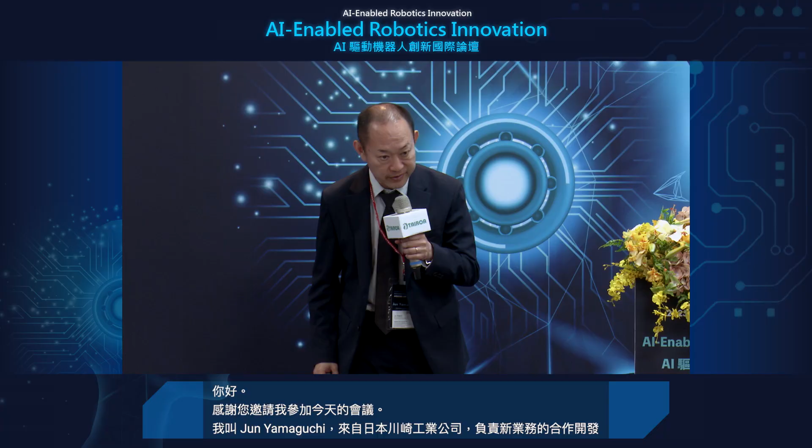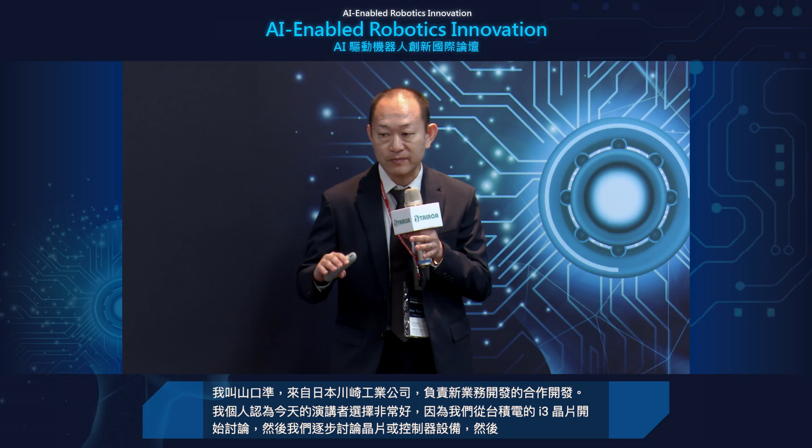new business development. Personally, I think today's selection of speakers is very good because we started a discussion from the silicon level, from TSMC, and after that we stepped up to the chips or controller devices, and after that to the environment for development.

For now, I'd like to share my information about the social implementation for robots. Before that, I'd like to introduce Kawasaki briefly, and after that introduce our initiatives for social robots. After that, this is a core part: the third point is robotics sophisticated by AI. And after that, we'd like to introduce some collaboration space in Japan, Kawaruba.

As you know, we at Kawasaki provide a wide variety of products for sea, land, or air. And I hope many people enjoy Kawasaki's motorcycles in your house, hopefully.

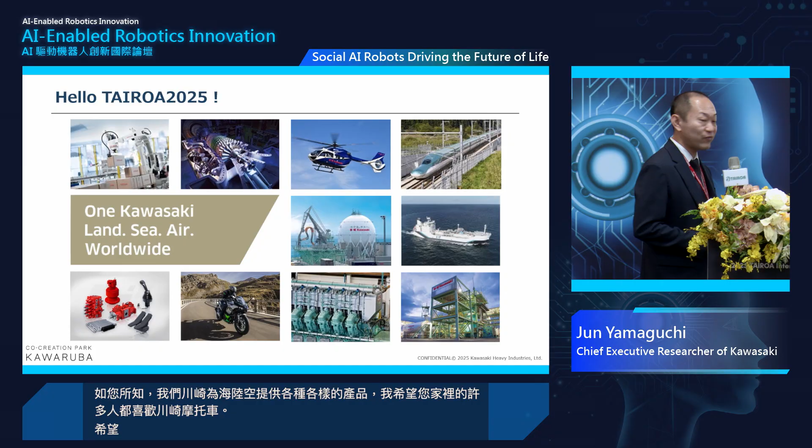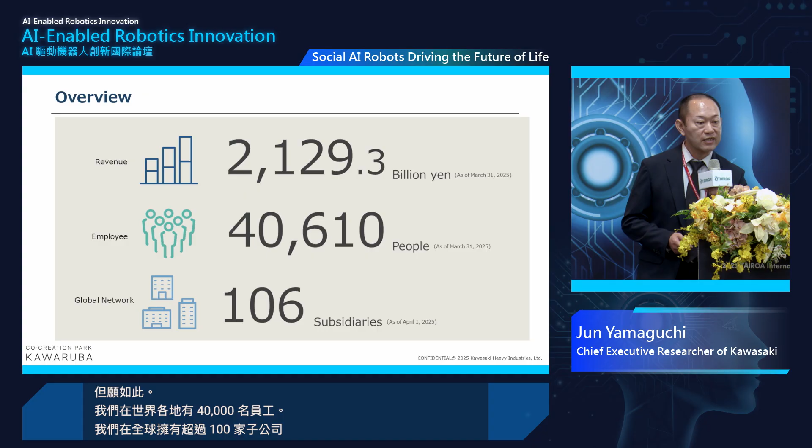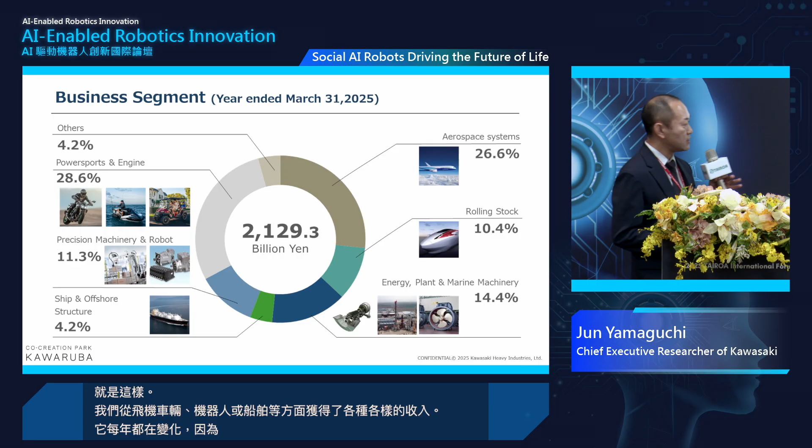In Kawasaki, we have 40,000 people working all over the world, and we have over 100 subsidiaries worldwide. We have a wide variety of income from airplanes, rolling stocks, robots, or ships. It changes year by year because world economics drastically changes.

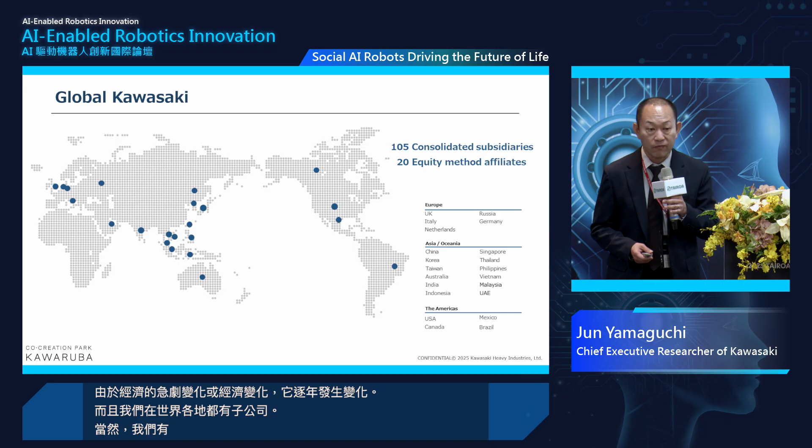We also have subsidiaries all over the world. Of course, we have subsidiaries in Taiwan mainly for robotics.

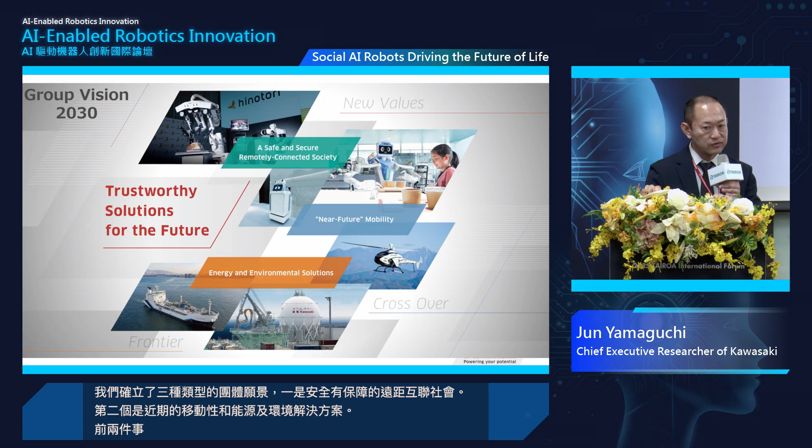We established three types of group vision. One is a safe and secure, remotely connected society. The second is near-future mobility, and energy and environmental solutions. The first two things have a very deep relationship with social robots, I think.

Okay, let's go on to the deep dive into the social robot initiatives. Let's track to our initiatives.

Maybe some people know Kawasaki started the industrial robot business over 50 years ago. After that, we promoted our robots into the automotive sector. After that, we enhanced our promotion to the semiconductor system. And recently, we step out from the factory for robots, mainly for telesurgery systems or humanoid robots.

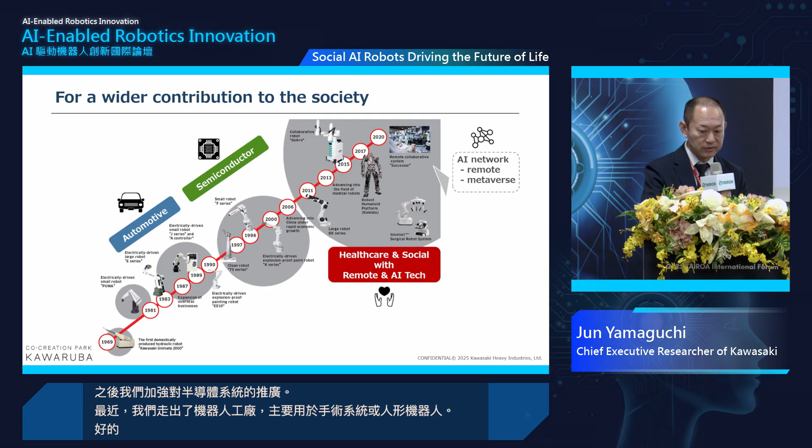Let's go on to our recent activities in these 15 years. Firstly, we started incorporating cutting-edge technologies into robotics. For example, the second era is robot plus network.

That means a robot can be operated remotely, so a robot is not a machine, it's a remote worker. The third era is robot plus network plus AI, as we discussed today, and that can determine the robotics itself and communicate with a human through the robot.

So we call that the robot can be an assistant, not a machine. The fourth era is robot plus network plus AI plus agent. They can decide their behavior by themselves, meaning the robot is a companion. In this later part, I will show you some small videos for each case.

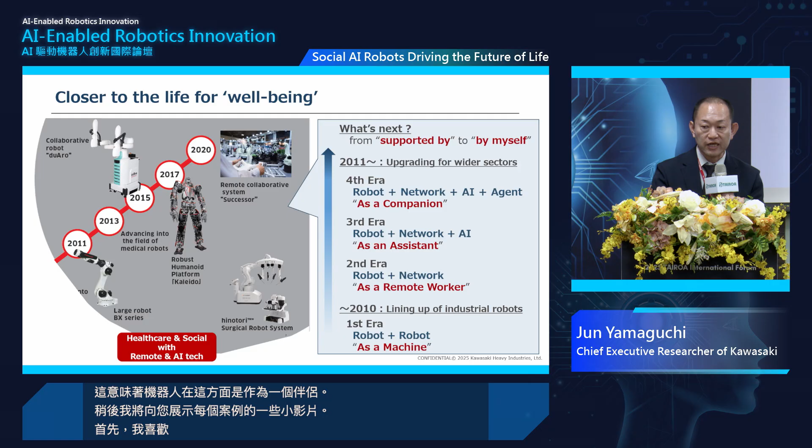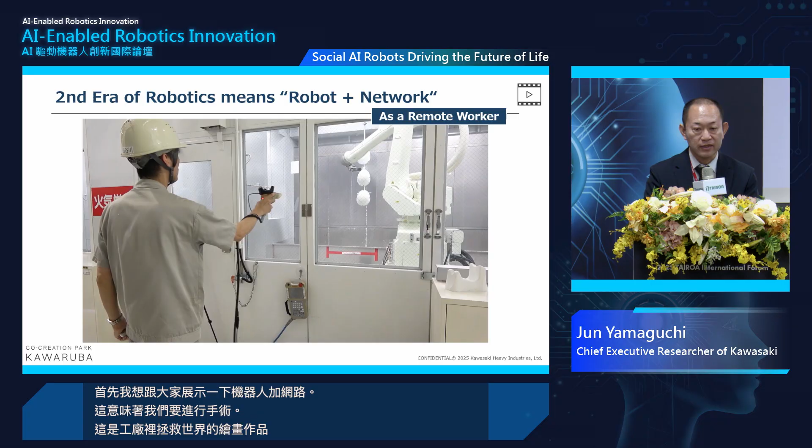First of all, I'd like to show you robot plus network, meaning remote operation. This is a painting work in the factory to save workers from dangerous work because the ingredients are very harmful.

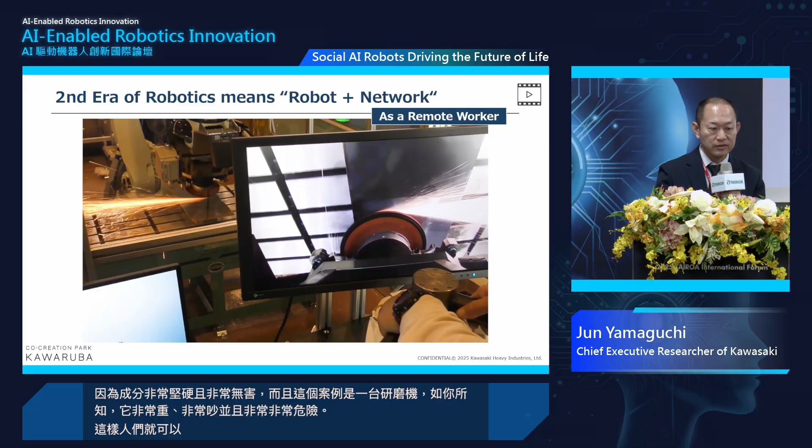This case is grinding. The grinding machine, as you know, is very heavy, very noisy, and very dangerous. So people can operate a small controller to perform the grinding.

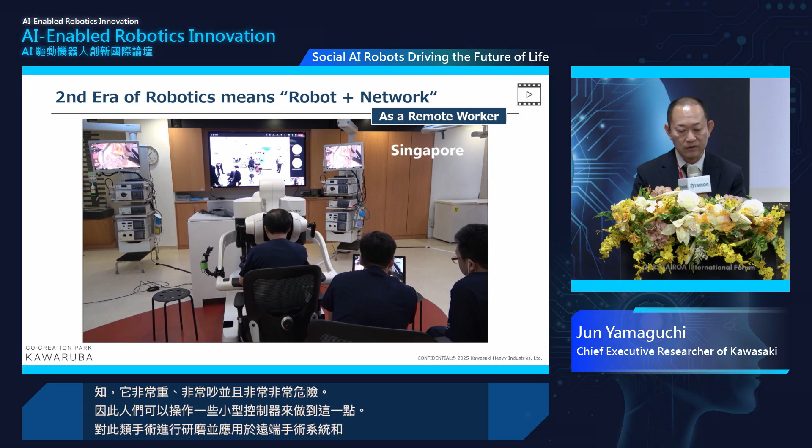And such kind of operation is applied to the telesurgery system. We conducted long-distance teleoperation from Singapore to Japan, maybe 5,000 kilometers.

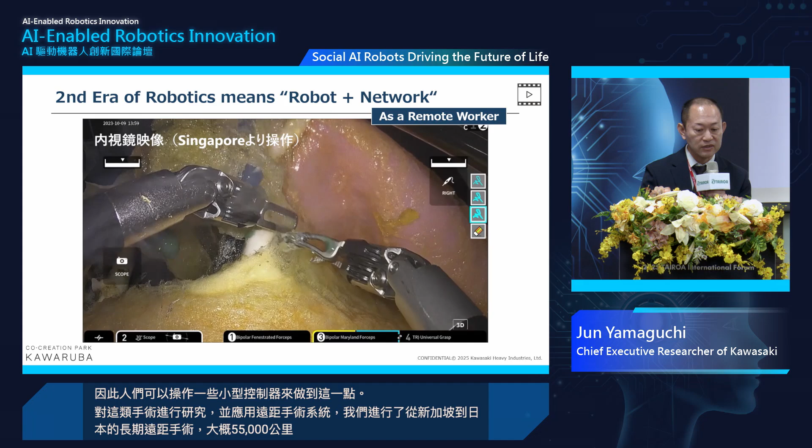This is remote control of the robots. The third is robot plus network plus AI. As you know, the robot can communicate with humans.

We already implemented this kind of robot into Japanese hospitals for a few years. Today, Kawasaki has a booth over there, and we exhibit these types of robots used in hospitals. This is a delivery robot in the hospital.

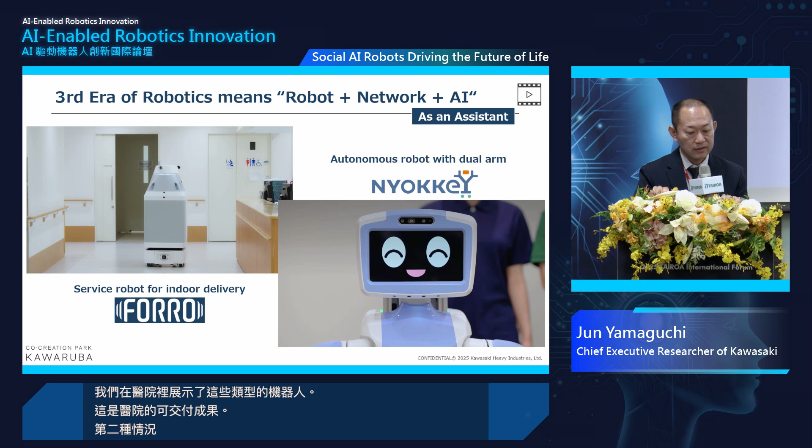The second case, on the right side, is a communication robot. We call it Nyokkey. We're trying it in nursing care homes to save workers there. Instead of staff, Nyokkey can communicate with the nursing caretaker.

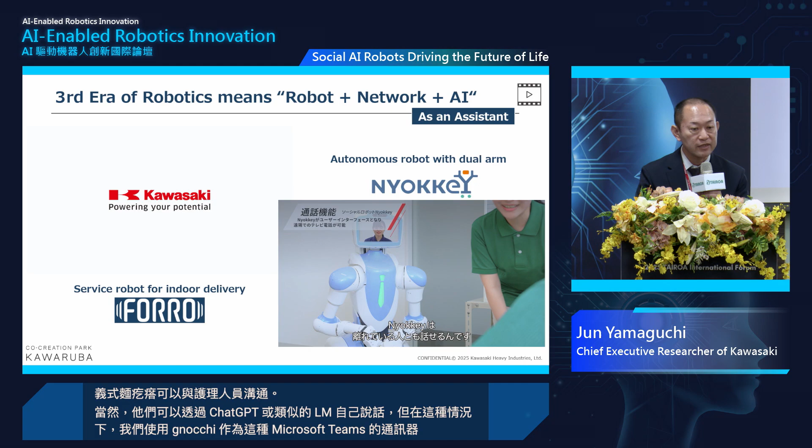Of course, Nyokkey can speak by itself using ChatGPT or similar LLMs. But in this case, we use Nyokkey as a telecommunicator, like Microsoft Teams. Instead of an actual human, the remote-side person can connect to the patient.

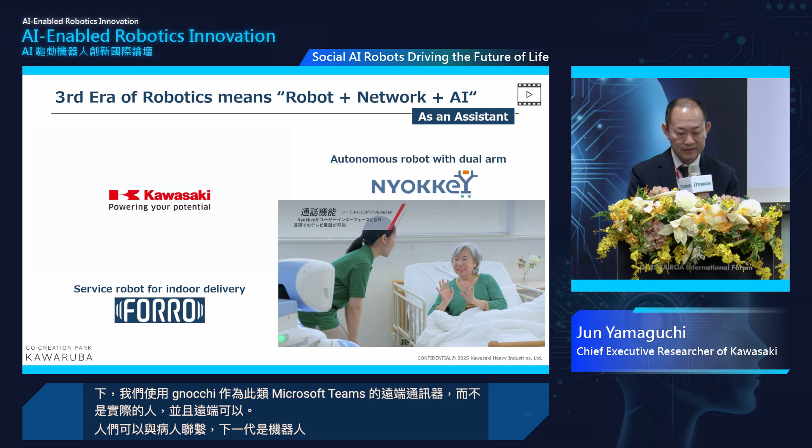Especially in Japan, we see many natural disasters in recent years. So the government needs this type of technology to avoid disasters or rescue people from disaster areas.

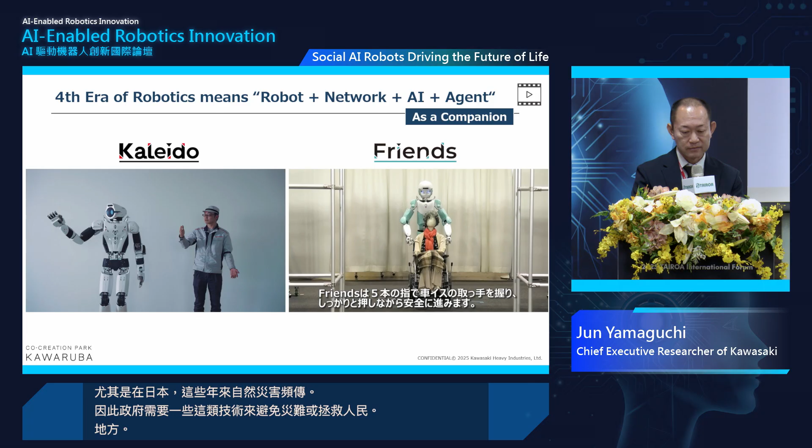The right side is Friends, and that means support for nursing care or hospital work. It's not powerful, but they can carry wheelchairs in the hospital, and of course communicate with the patient.

It's fine. Let's go to the outside of the hospital. That's okay, that's very easy. But at this moment, this is not allowed by Japanese law. So we Kawasaki are collaborating with the Japanese government to change the law to use these types of solutions.

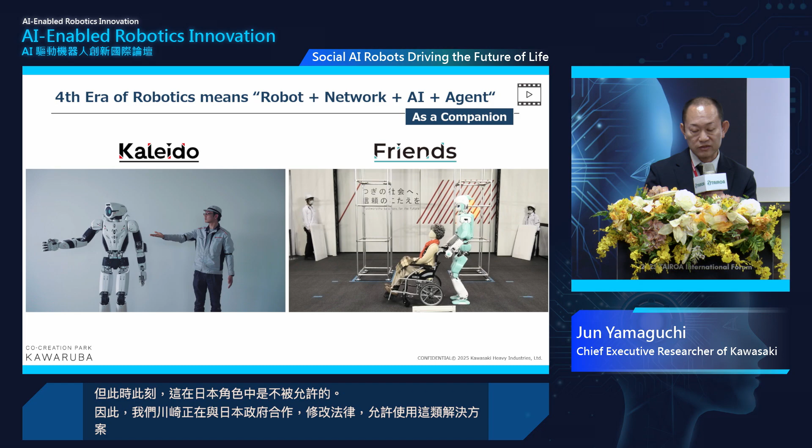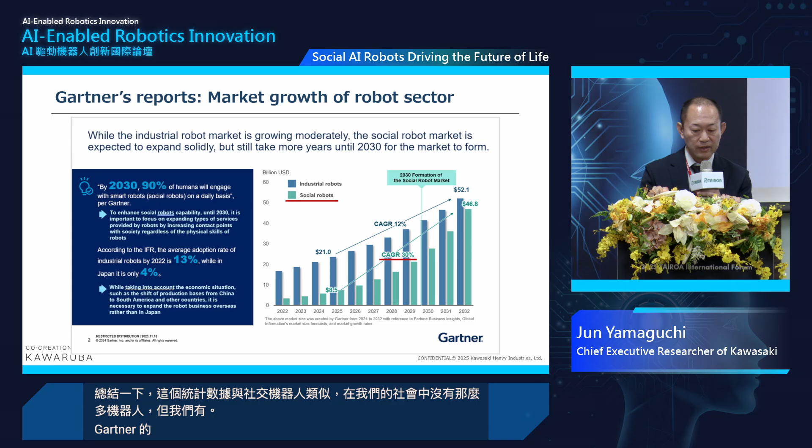As some statistics show, social robots were not so many in our society, but Gartner's reports show the CAGR of social robot is very steep, over 30%. It's a very promising market, and the marketplace is the Asia area. It's not so big, but very high growth. We think so, and we'd like to make some market and business in Asia with your company.

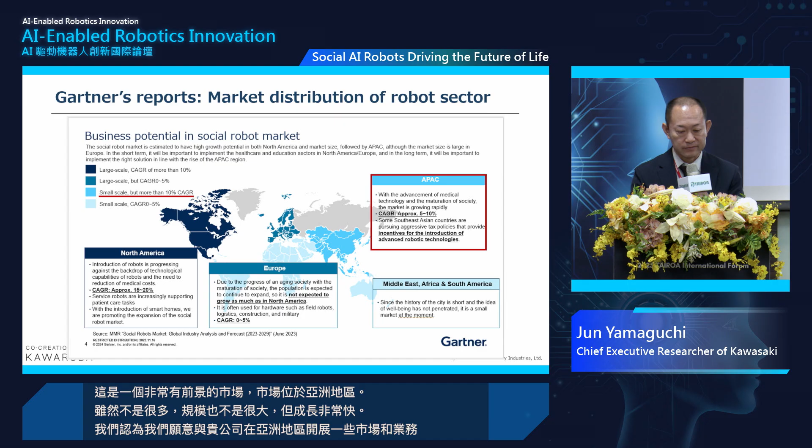Actually, in Kawasaki, we have some requests from other companies to use the social robots, for inspection, guidance, or rescue for each company, mainly for social infrastructure companies. Until now, we, Kawasaki, collaborate with other companies to enhance the robot's function.

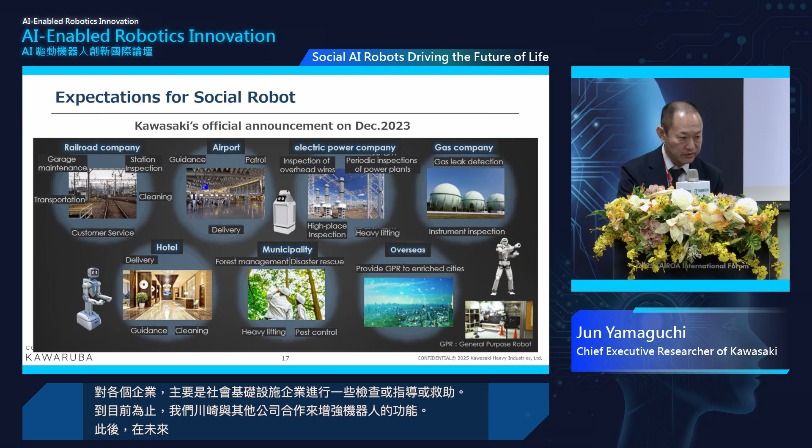After that, in the future, what is next? The robots can help us, and we can do more things with a robot. This is the concept video, the CORLEO, a combination of a motorcycle and robots. You can find this type of robot at the Osaka Expo this year.

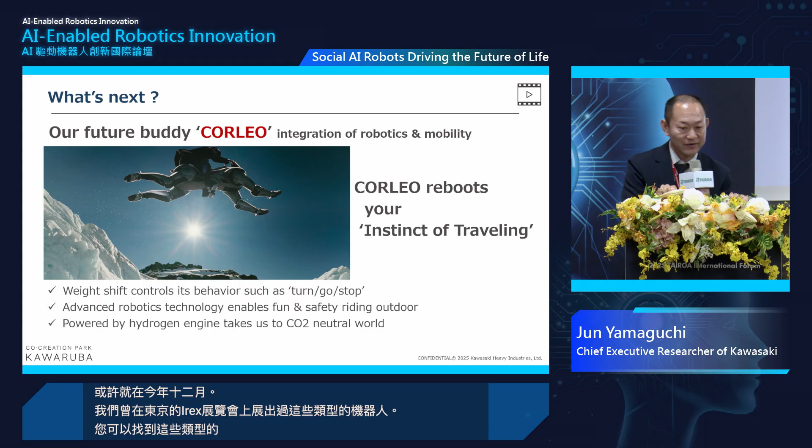And maybe this December, we will exhibit this type of robot at IREX in Tokyo. You can find these types of robots there. That's our trajectory for the social robot trials.

And after that, from now, I'd like to step into AI. As some mentioned, the social robot is different from the industrial robot, because industrial robots need efficiency and repeatability, but social robots need flexibility and robustness, because there are different types of requirements from humans or people. That's very different from the factory.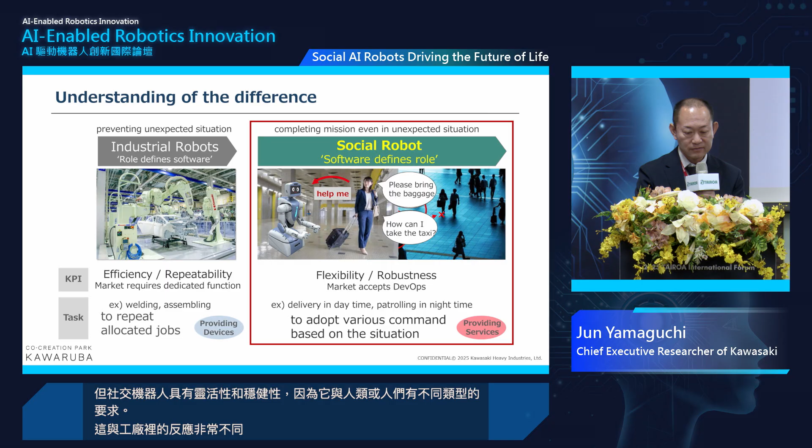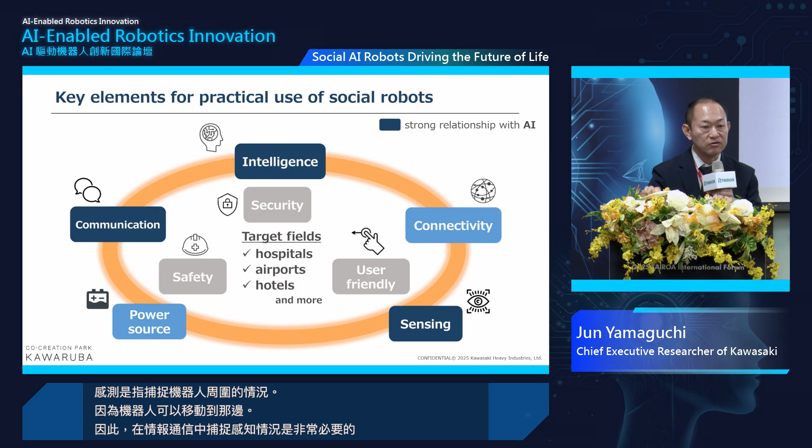To react to that, many types of technology are needed, mainly intelligence represented by AI, communication with a human represented by conversation, and on the right, sensing. Sensing means catching the situation around the robot, because the robot can move, so it's mandatory to sense the surrounding circumstances. Intelligence, communication, and sensing are established from AI, I think.

For sensing, we would like to start from visual AI. Regarding intelligence, we use knowledge bases. And for communication, we start from conversation. But all this AI is being developed not only by Kawasaki, it's already on the shelf, in the market, developed by other companies. So we collaborate with such companies to make that happen.

And finally, on the right, motion generation. That means embodied AI, or physical AI. That's very important for the actual robot, but it's easy to say and hard to create. In that case, we'd like to collaborate with your company to create that.

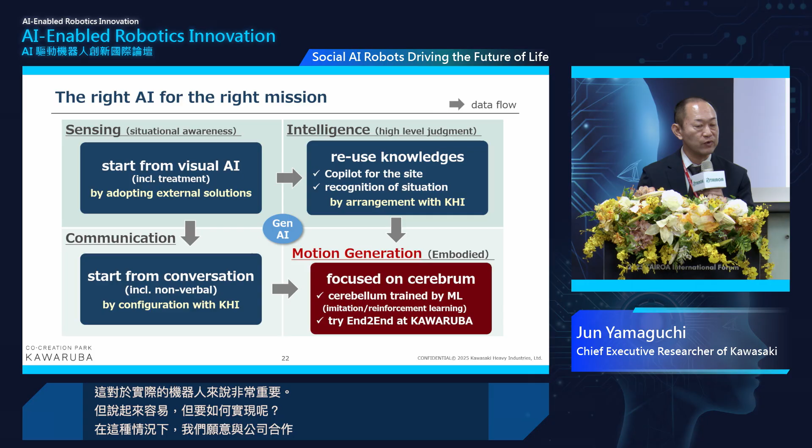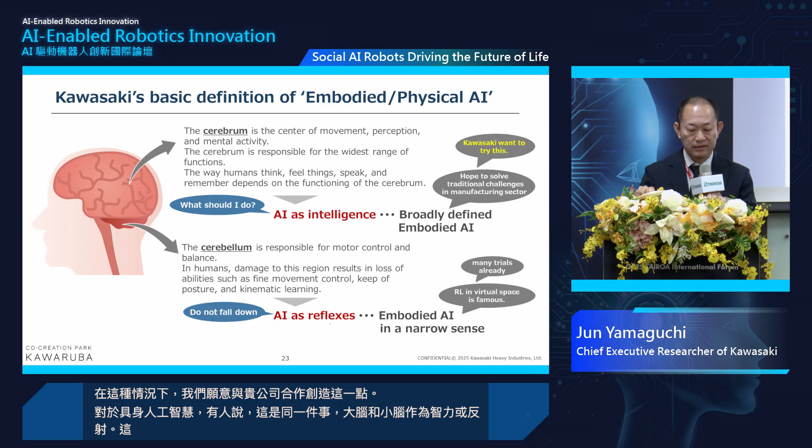For embodied AI, someone says it's the same as the cerebrum and cerebellum, as intelligence and reflexes. These types of thought are put into the robotics controller, using some core layers for the robot controller. But it's just a concept, and we, Kawasaki, are trying to establish this type of layer infrastructure, and we will deliver this information to other robot companies, so it will be helpful for them to collaborate using the same layer and communicate on the same software modules.

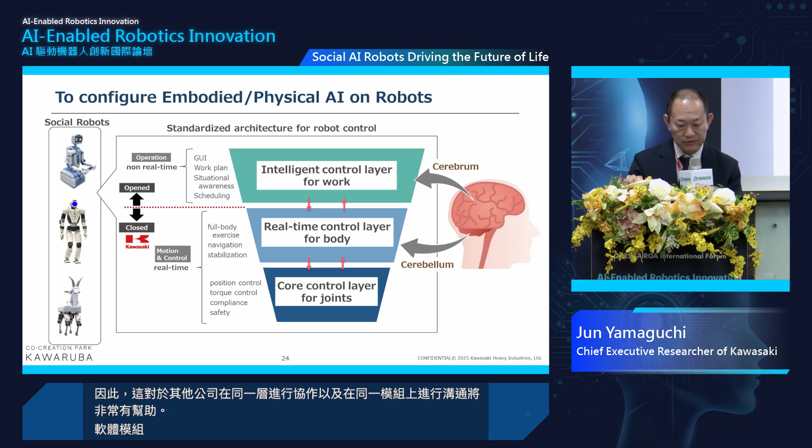The right side is a very tight clearance assembly line. It depends a lot on the feeling of touching. It's very hard to create the AI, but we take the data from the remote operating system and train the AI using that data, then move toward automation.

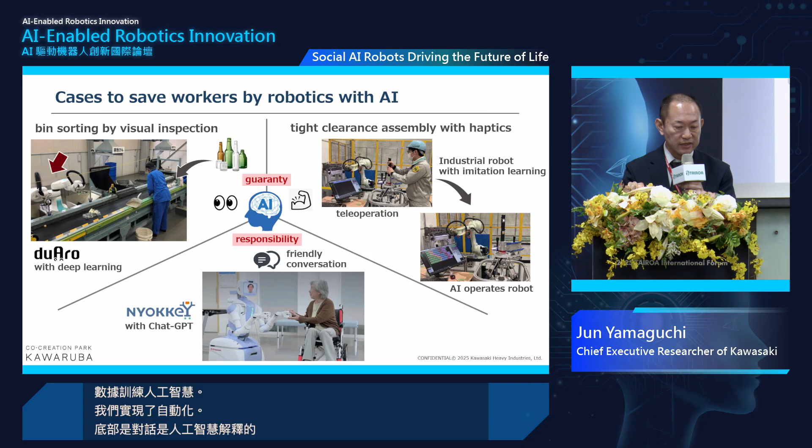The bottom side is conversation, as I explained before. This is just a sample for the tight clearance automation, assembly automation. On the left, people are operating a controller for remote operation of the robots, and it's very hard clearance to assemble manually—very hard to make software for a robot to do it.

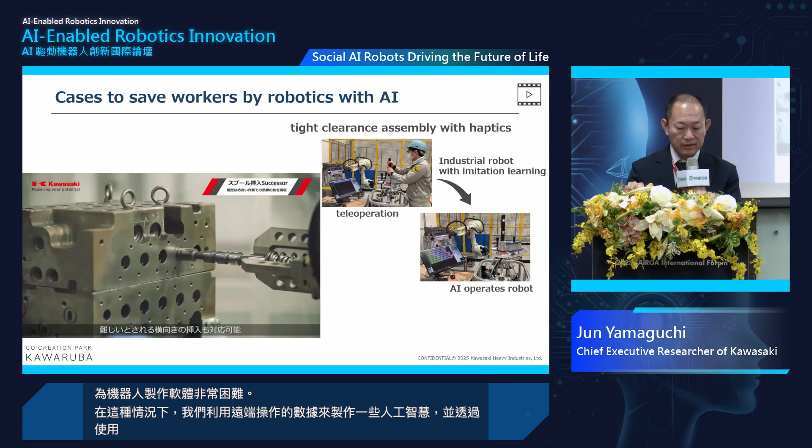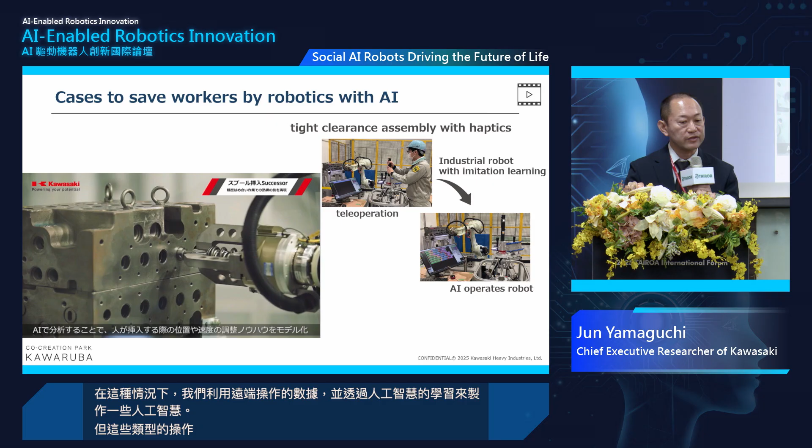In that case, we utilize the data from the remote operating to make AI through learning. But we don't have to ask the operator so many times for this kind of operation, so we like to use imitation learning with a small size of data. It succeeded—this movie shows it being operated by AI.

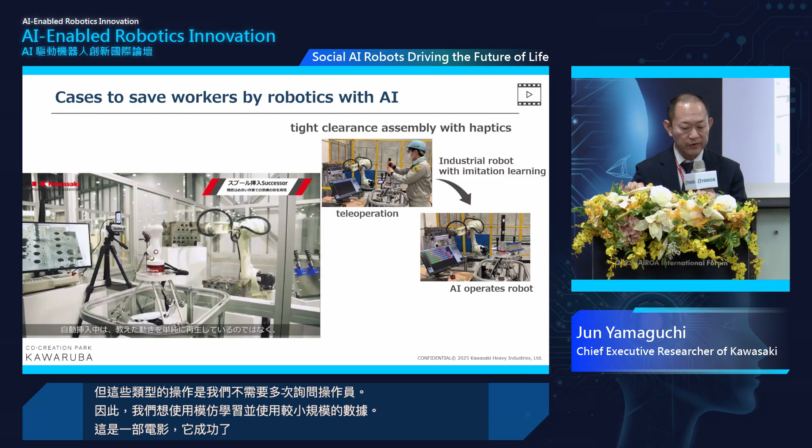Of course, we are also trying small cerebellum training, using Isaac Lab from NVIDIA. It's mandatory for the robustness of social robots.

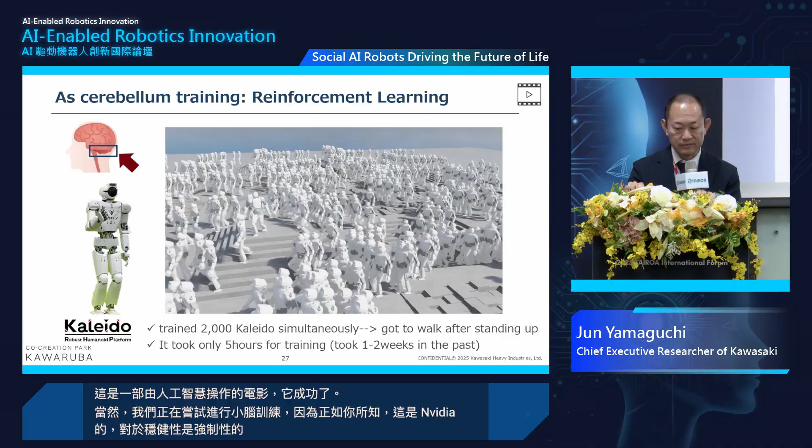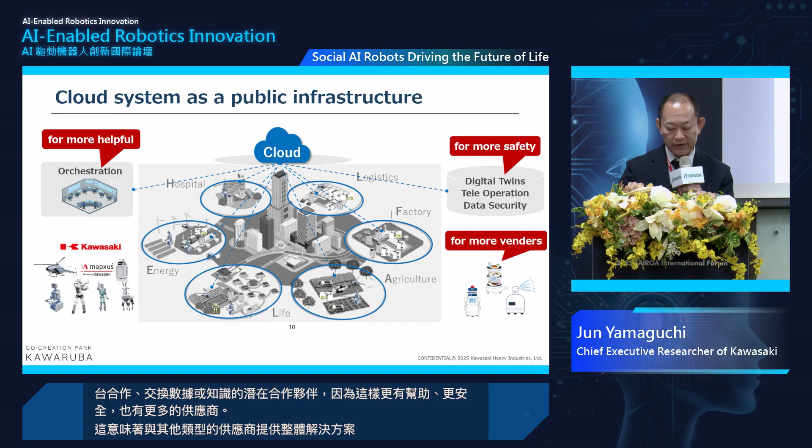Until now, we talked about a single robot, single operation. But in the future, many types of robots, not only by Kawasaki but different vendors, will collaborate in our society. For that, we like to have public infrastructure. We are building that as a cloud system, which we call a social robot platform. There are many platforms in society, but no competitors, I think. It's a potential collaboration partner to exchange data or knowledge with other platforms, for more helpfulness, more safety, and more vendors. That means a total solution with other vendors to secure our future.

Not only the technical side, but we're also discussing with the Japanese government how to use data gathered from the robots. Data on the cloud is used by different companies, AI developers, so that means data beyond borders. We like to ask the Japanese government to make rules or guidelines between other companies and countries. We are discussing internally with the Japanese government, and we submitted an AI white paper to the Japanese cabinet. So we are stepping into a new phase to create a new AI nationally.

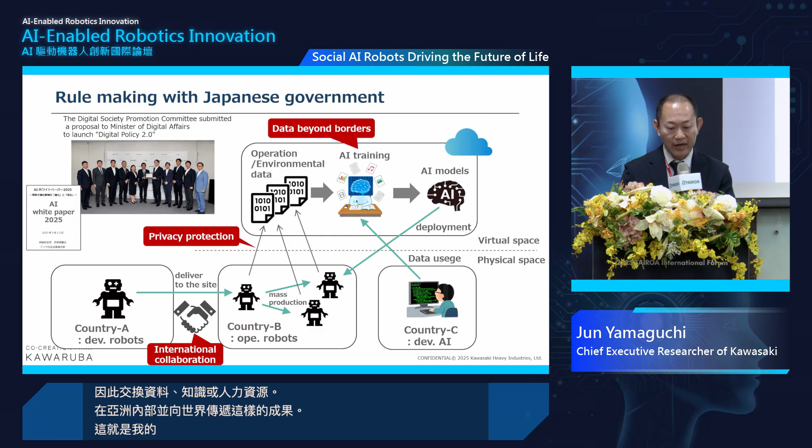But Japan is a small country, so we'd like to connect with other countries, especially in Asia, to create some basic economic range in Asia—exchanging data, knowledge, and human resources inside Asia to deliver such outcomes to the world. That's our vision.

But the most important thing is safety, as you said. We think there are two types of safety: physical safety and psychological safety. Physical safety means the robot's behavior—soft contact, falling safety, interaction, ensuring clearance from other items, touching. Psychological safety means easy-to-understand behavior, because if the robot cannot control its movement differently from humans, it's very terrible. So we have to take care of such aspects. The second issue is no unexpected behaviors—that's very dangerous, as you can understand.

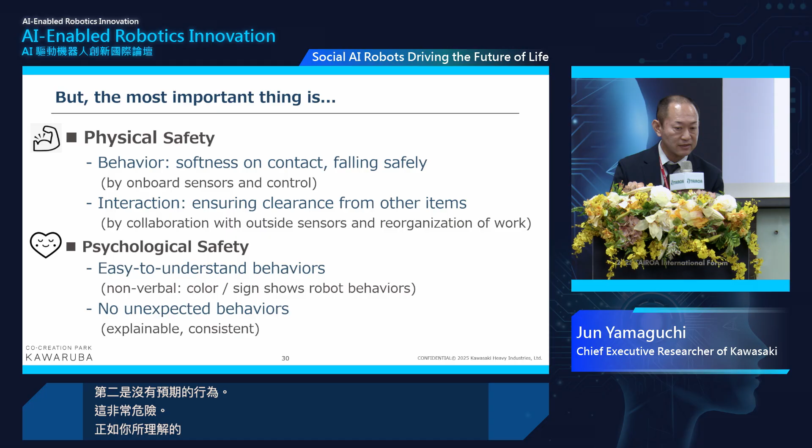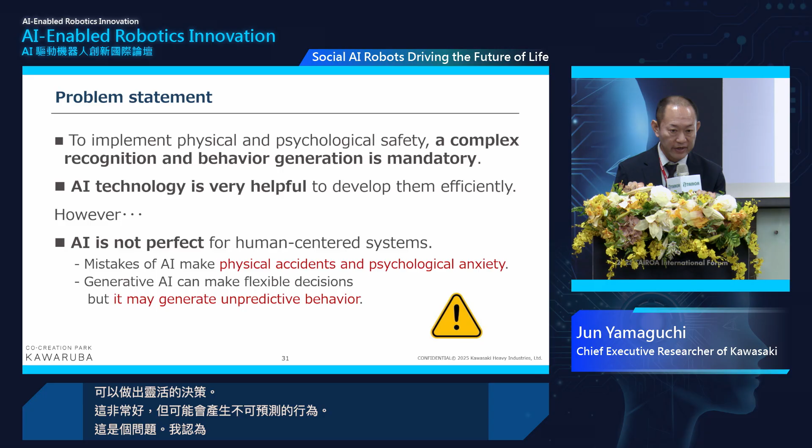This kind of problem statement will be set up to implement physical and psychological safety—complex recognition and behavior generation is mandatory, I think. AI technology is very helpful to develop them efficiently, but AI is not perfect at this moment. Mistakes by AI can cause physical accidents or psychological anxiety. Generative AI can make flexible decisions—that's very good, but it might generate unpredictable behavior. That's a problem, I think. In that case, for robots to be implemented in society, it should be guaranteed that AI decisions are safe.

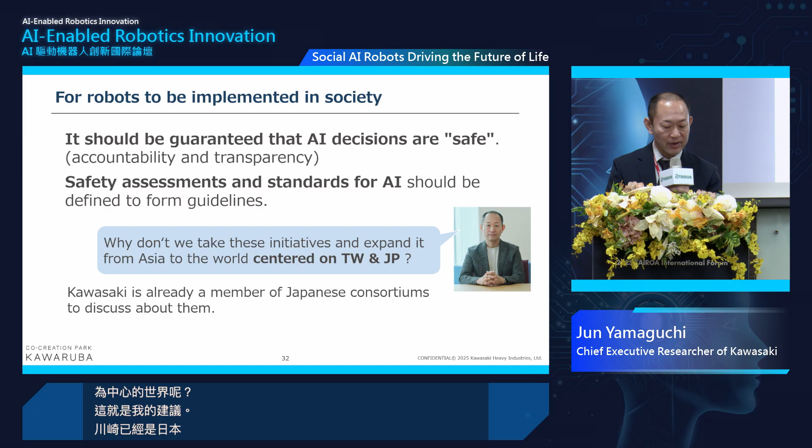Safety assessment and standards for AI should be defined to form guidelines, hopefully from Asia. So I would say, why don't we take these initiatives and expand it from Asia to the world, centered on Taiwan and Japan? That's my proposal. Kawasaki is already a member of Japanese consortiums discussing these matters. This is just a concept—as a team, let's expand an unprecedented lifestyle from Asia to the world with robots.

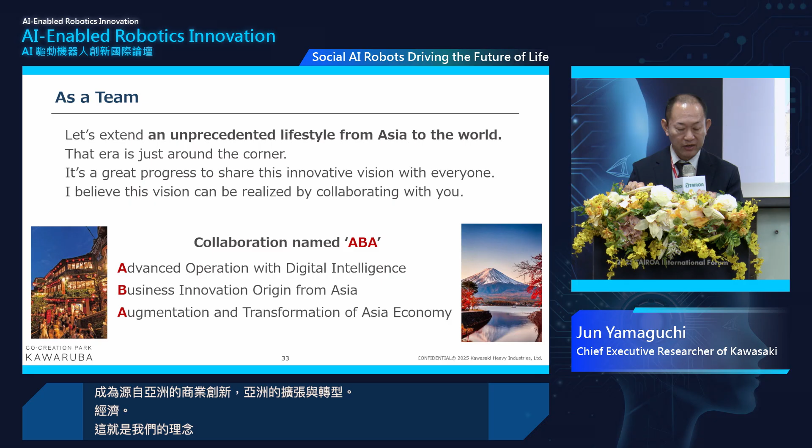That era is just around the corner. It's great progress to share this innovative vision with everyone today. I believe this vision can be realized by collaborating with companies all over these rooms. We named this collaboration ABA: A, advanced operation with digital intelligence; B, business innovation origin from Asia; A, augmentation and transformation of Asia economy. That's our concept for collaboration in Asia.

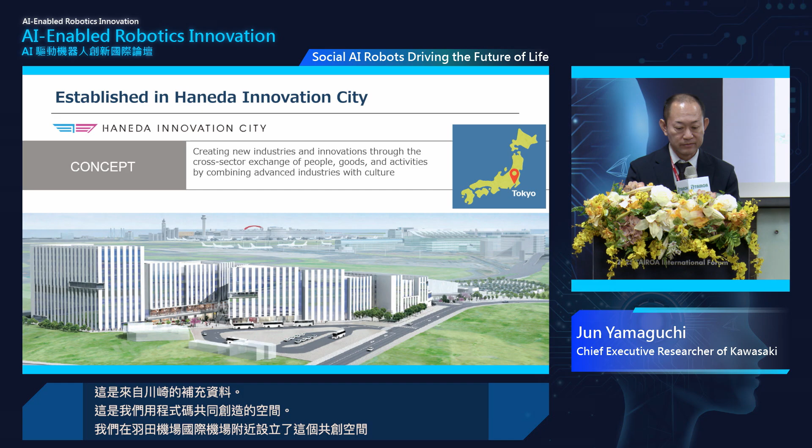This is additional information from Kawasaki—our co-creation space called Kawaruba. We established this co-creation space near Haneda International Airport in Tokyo. That space is used not only by Kawasaki, but also ANA, Denso, Iwatani. Each sector has innovative power, so we collaborate with other companies like ANA or Denso to create new innovation.

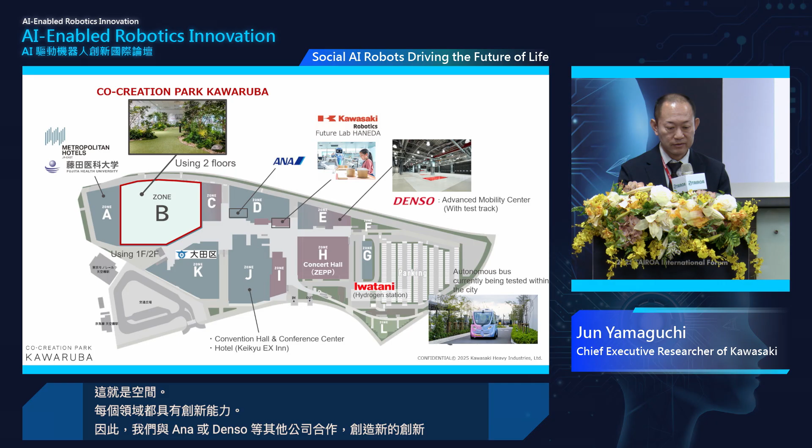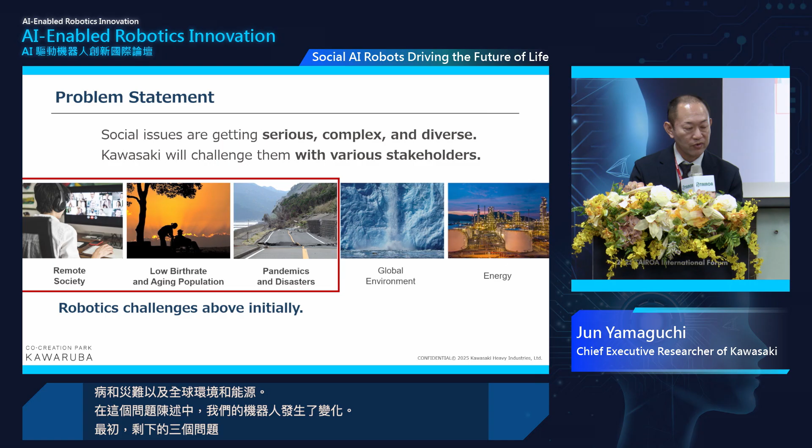In Kawaruba, we set up 5 problem statements: remote society and low birth rate and aging population, pandemics and disasters, and global environment and energy. Robotics addresses these problem statements, initially the left 3 problems. In Kawaruba, we also set up two types of business themes: one is hydrogen and carbon neutral energy, the other is our initiative on social robots.

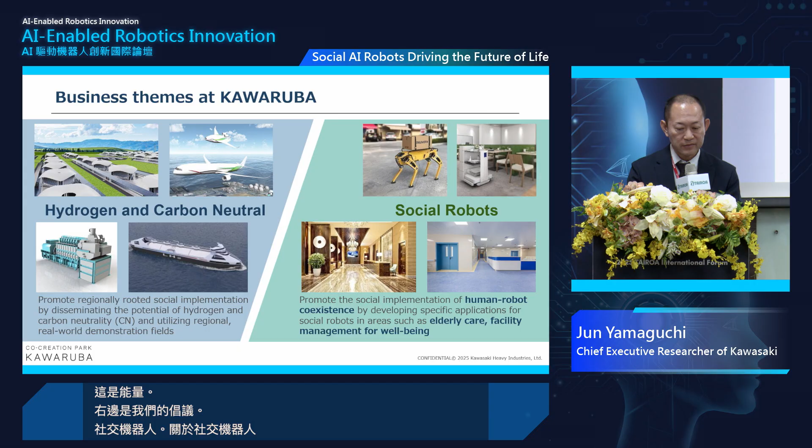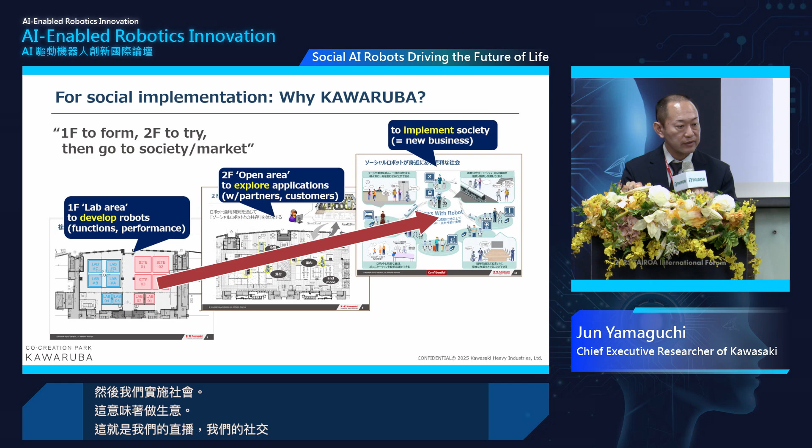Regarding social robots, in Kawaruba's first floor we develop the robots themselves. On the second floor, we explore applications for social robots with partners, companies, and academia. After that, we implement them in society—that means making a business. That's our stream of social implementation for social robots.

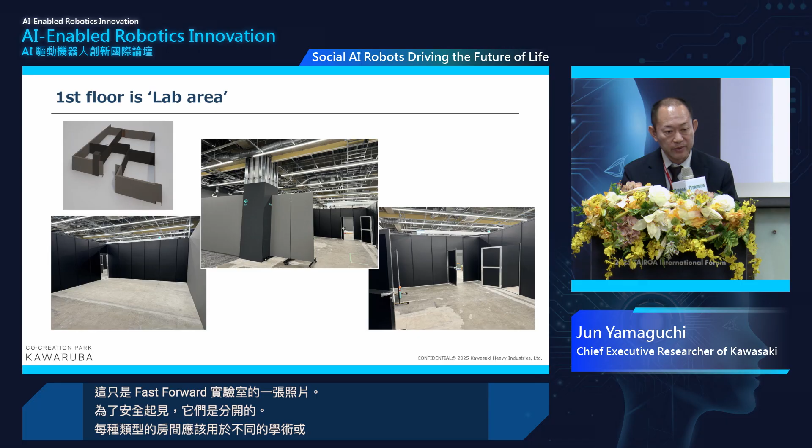This is just a picture of the first floor lab. It's separated for security and safety. Each type of room should be used by different academia or partner companies with Kawasaki.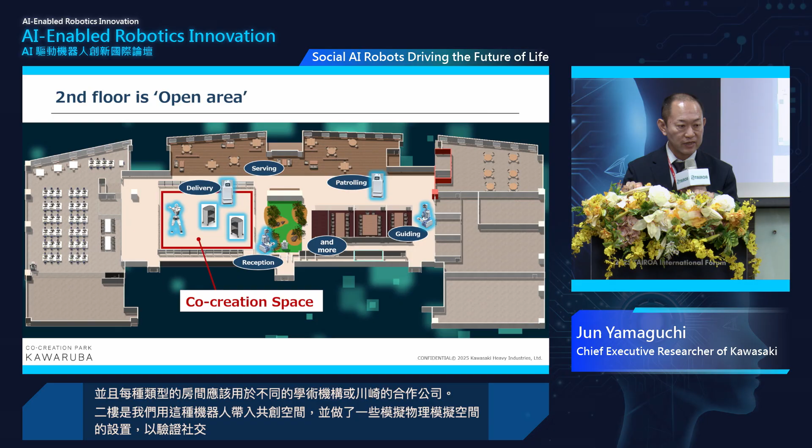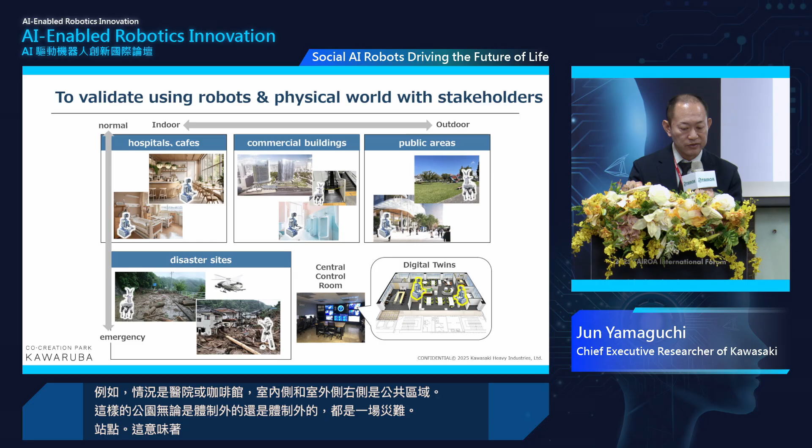The second floor is where we bring such robots into the co-creation space and set up a physical simulation space to verify the usage of social robots. For example, the situation could be hospitals or cafes indoors, and outdoors a public area such as parks, or the other side being disaster sites—meaning to rescue people from dangerous situations.

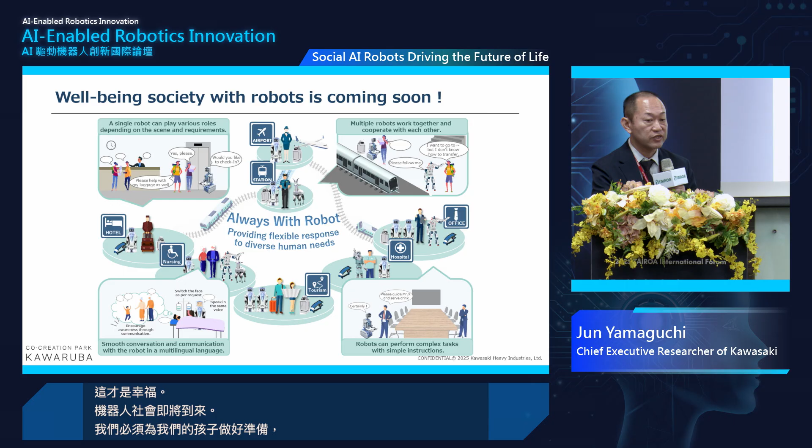We can challenge these problems at Kawaruba together with your companies. A well-being society with robots is coming soon. We have to prepare for that, for our children and grandchildren. Thank you—let's enjoy the future world with social robots with Kawasaki. Thank you so much.